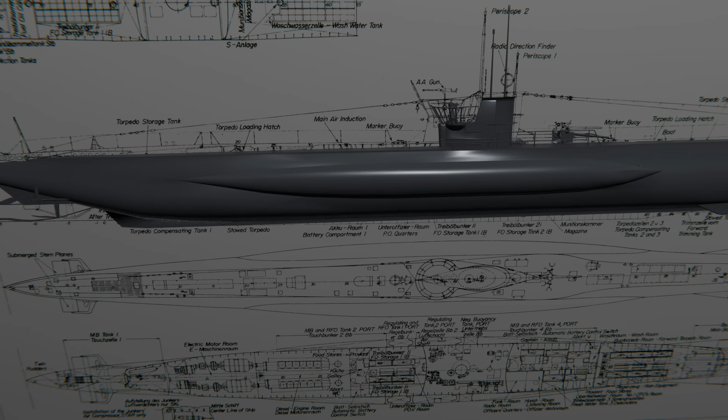At 7:39 p.m., the order was given. A single torpedo slipped from its tube and raced toward the unsuspecting liner. The explosion tore through the Athenia's hull, the concussion ripping apart the engine room and instantly killing several crew members below decks. Lights flickered and then died as seawater rushed into the gaping wound. Within minutes, the ship began listing to port.

Panic erupted on the crowded decks. Lifeboats were lowered in frantic haste, some crashing into the sea as inexperienced passengers struggled with the mechanisms. Women screamed as they were separated from their children in the chaos. The ship's radio operator desperately tapped out SOS signals as the cold Atlantic water rose steadily through the vessel.

The truth would eventually surface, but not before the tragedy had claimed 112 lives, including 28 Americans. The sinking sent a shockwave through diplomatic circles and newspaper headlines around the world. For Winston Churchill, it was a propaganda gift, proof of German cruelty. For Franklin D. Roosevelt, it was a grim reminder of how quickly neutral lives could be lost in this new war.

After the torpedo's deadly strike, U-30 slipped silently beneath the waves, leaving behind the chaos and screams of the sinking Athenia. Lemp ordered the submarine to dive deep and set course eastward, running quietly on electrical motors to avoid detection by any British warships that might respond to the distress calls. The crew moved with practiced efficiency, though some stole uneasy glances at each other. This wasn't the military target they'd expected.

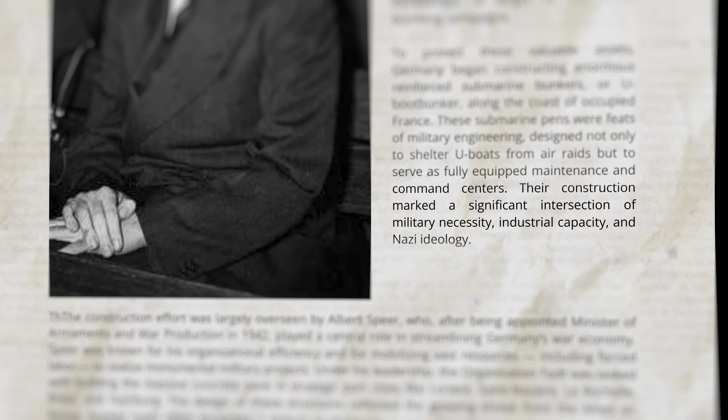Dönitz found a powerful ally in Albert Speer, Hitler's architect and later Minister of Armaments and War Production, who recognized the strategic importance of protecting Germany's submarine fleet. Speer's organizational genius and control over production resources proved crucial in turning Dönitz's vision into reality. The actual construction was overseen by Organisation Todt, the Nazi civil and military engineering group, under the leadership of Fritz Todt until his death in 1942, and subsequently by Speer himself. The collaboration between these men created one of the most formidable defensive systems of the war, with construction priorities often overriding other military projects due to Dönitz's direct access to Hitler and his position as one of the few military leaders who maintained the Führer's confidence throughout the war.

The engineering challenges involved in building these pens were staggering. Each facility required hundreds of thousands of cubic meters of concrete, thousands of tons of steel reinforcement, and an army of workers laboring around the clock under often brutal conditions.

The French ports selected for these bases, particularly Lorient, Saint-Nazaire, La Rochelle, and Brest, were chosen for their strategic locations facing the Atlantic, but converting them into a fortress required a complete reimagination of traditional port infrastructure. German engineers developed new concrete formulations and construction techniques to create structures that could withstand direct hits from the largest bombs available to the Allies at that time.

The roofs of these pens were designed with multiple layers, often including a softer concrete layer to absorb blast energy beneath the harder outer shell, a concept that anticipated modern composite armor principles.

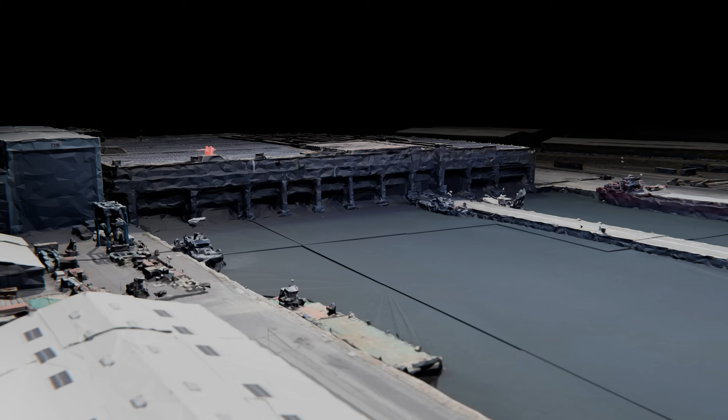The entire landward side was further protected by flak positions with 88mm guns mounted on massive concrete pedestals, their firing arcs calculated to create overlapping fields of fire against both aircraft and ground attacks. The basin's water circulation was carefully engineered with a system of gates and channels that allowed continuous water exchange to prevent stagnation, while underwater microphones detected any attempted sabotage by divers.

The entire perimeter was illuminated at night by searchlights mounted on retractable towers that could be lowered into concrete shelters during air raids. This combination of maritime engineering and military fortification created what German propaganda called the unsinkable aircraft carrier on the Atlantic coast, a base that survived countless Allied bombing attempts and remained operational until Germany surrendered in 1945.

The La Rochelle submarine pen complex was an architectural and engineering marvel of the Third Reich's naval infrastructure, featuring 11 individual docking bays that were each designed as self-contained submarine maintenance and repair facilities. The multi-floor design of each dock was a carefully calculated response to the complex operational requirements of U-boat warfare, the physical constraints of the massive concrete structure, and the need to maximize efficiency with the limited protected space of the fortified enclosure.

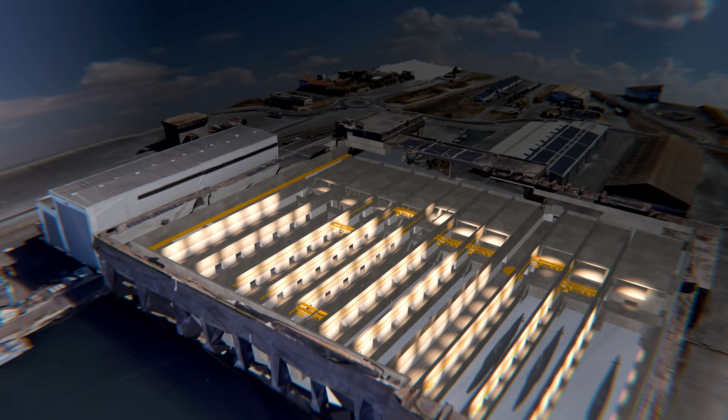Each of these 11 docks followed the same fundamental three-level vertical organization, but with subtle variations in equipment and layout, depending on their specific position within the complex and their designated functions. At the very foundation of each dock was the submerged operational level, a carefully engineered underwater workspace that extended from the basin floor up to the waterline.

This zone maintained a constant depth of 8 meters to accommodate the draft of Type 7 and Type 9 U-boats, with the concrete walls featuring specially designed fendering systems made of timber spaced 50 centimeters apart to protect both the submarine hull and the dock structure itself. The basin floor was not flat but slightly sloped toward the central drainage canals that fed into powerful pumping stations capable of completely draining the dock in under 4 hours when necessary.

This underwater level was illuminated by waterproof lamps installed behind thick glass portholes set into the dock walls at 2-meter intervals, creating adequate visibility for divers performing hull repairs or inspections. Rising above the waterline was the primary working deck, an expansive 2.4-meter thick reinforced concrete platform that formed the heart of each dock's operations. This level extended 15 meters back from the dock edges on all sides, creating a vast workspace that was precisely leveled within 5 mm tolerance across the entire surface.

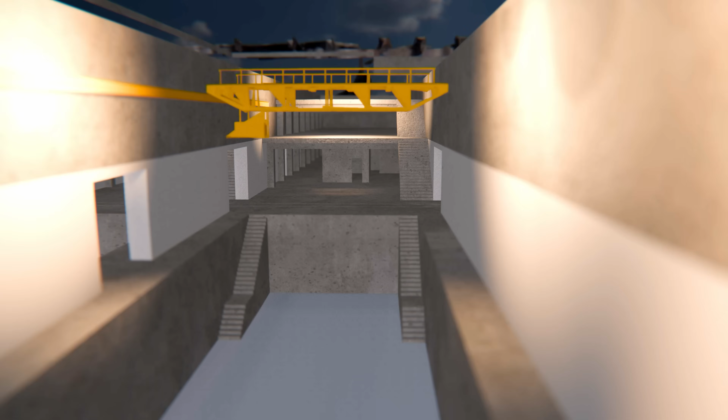Along the walls, a continuous workbench ran at 90 centimeters height, fitted with mounts, electrical outlets, and compressed air connections at 2-meter spacing. This main working level also contained several permanent installations in each dock, including a 5-ton jib crane near the bow position, a torpedo loading gantry, and a diesel fuel transfer station at the stern area.

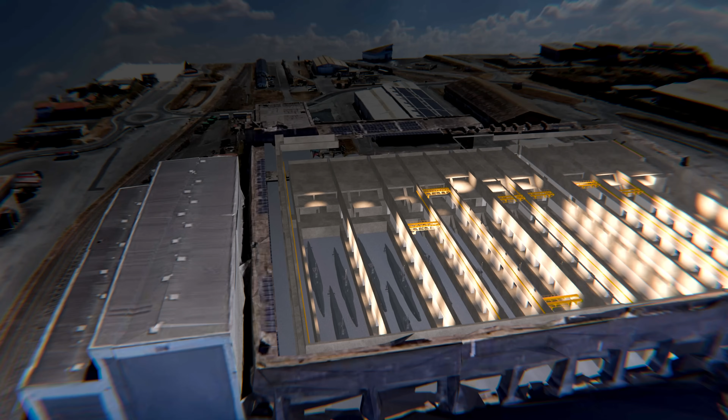The intermediate level, located 6.5 meters above the main working deck, housed the dock's mechanical infrastructure in a series of reinforced concrete alcoves set into the perimeter walls. To port were the electrical distribution rooms with their massive converters and switchgear. To starboard were the compressed air stations with their banks of high-pressure storage flasks. Aft housed the ventilation and control centers with their complex systems of dampers and filters, and forward contained the emergency power generators and fire suppression controls.

The upper operational level at 13 meters elevation was more variable in its layout between docks, reflecting their specialized functions. In the 6 central docks, this top floor formed a complete mezzanine covering about 70% of the dock area, housing the dockmaster's control room with its panoramic windows, the radio monitoring station, and the precise instrument workshops.

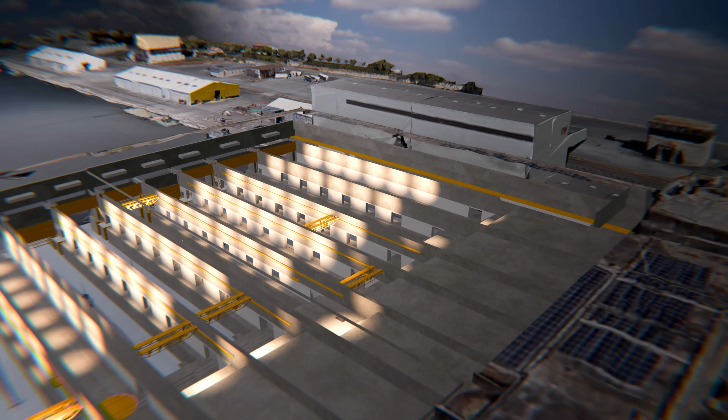The remaining 3 docks to the north had larger open areas at this level to accommodate the overhead crane systems needed for conning tower repairs. This sophisticated multi-level design allowed each of the 11 docks to function as an independent repair facility, capable of handling all aspects of submarine maintenance, except the most extensive overhauls.

The vertical separation of the activities improved both safety and efficiency. Potentially explosive battery work happened on the submerged level, away from the spark-producing metalwork on the main deck. Precision optical work occurred on the stable upper levels, away from the vibrations of the heavy machinery below.

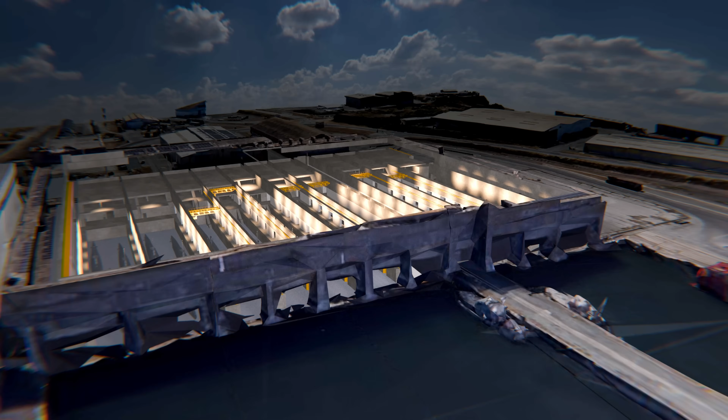The design also provided redundancy. If one level was damaged, work could continue on others. And security, as access between levels could be easily controlled, with over 38,000 square meters of functional workspace distributed across the multiple levels in the complex. La Rochelle pens could service up to 22 U-boats simultaneously, while protecting them from Allied bombs. A testament to the ingenuity of German naval engineering at the height of World War II.

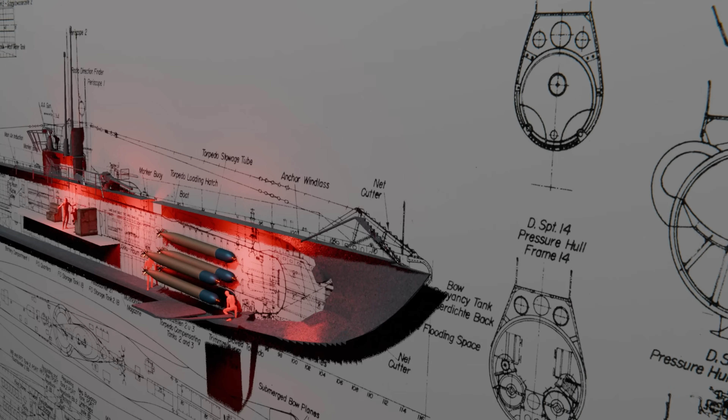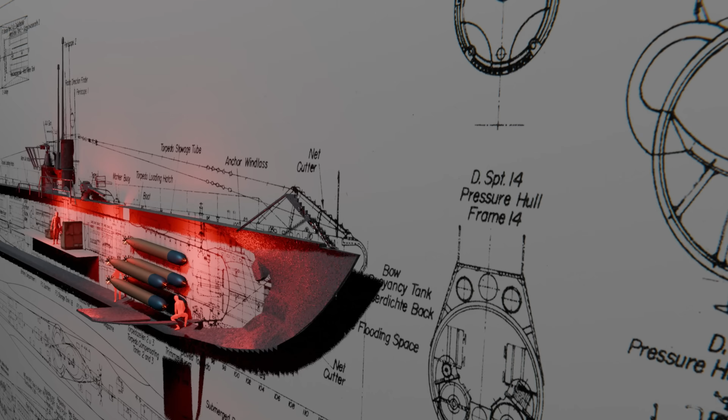The process of reloading torpedoes into submarines housed within the massive U-boat pens of La Rochelle was an intricate and labor-intensive operation, requiring meticulous coordination among specialized personnel, careful handling of heavy and volatile ordnance, and the use of purpose-built machinery designed to function within the confined and heavily fortified environment of the bunker. The reloading procedure itself was a carefully choreographed sequence influenced by the submarine's design, the layout of the pen, and the need to maintain operational secrecy and safety.

Before a torpedo could be loaded, it first had to be transported from one of the heavily guarded storage areas within the pen complex. These storage rooms were often located in chambers or in the rear section of the bunker, shielded by thick concrete walls to prevent catastrophic explosions in case of an accidental detonation or an enemy bomb strike.

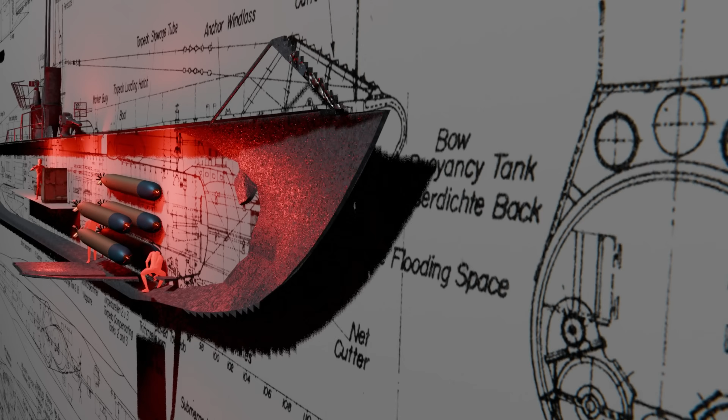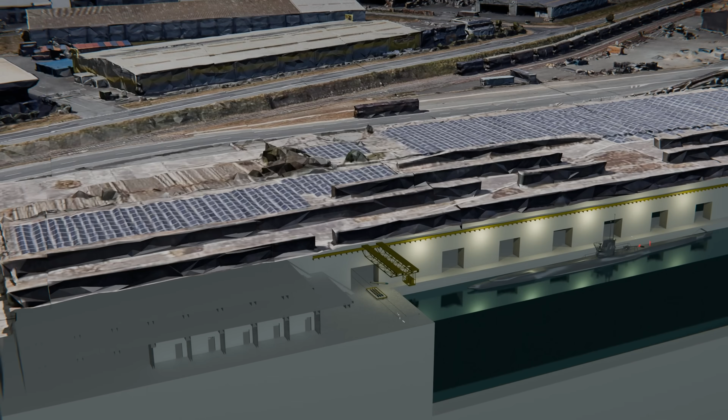The torpedoes themselves were delicate, yet extremely dangerous weapons, weighing between 1.5 and 2 tons each, depending on the type. They were filled with explosives, compressed air, and in case of electric torpedoes, volatile batteries that required cautious handling. Given the weight and sensitivity of the torpedoes, any sudden jolt or mishandling could result in damage of the weapon, or worse, an accidental explosion, so movement was slow and deliberate.

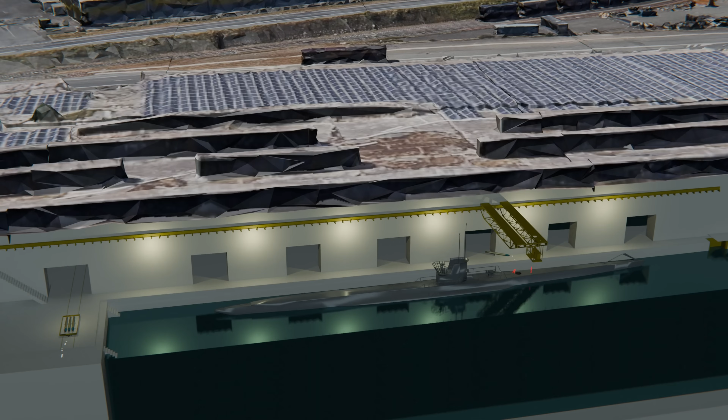Once the torpedo trolley reached the designated U-boat, the next phase of the operation began, lifting and aligning the torpedo for insertion. This was accomplished using heavy-duty overhead cranes, which ran along tracks mounted on the reinforced concrete ceiling of the pen. The cranes were capable of lifting multiple tons and were operated by experienced technicians who carefully maneuvered the torpedo into position.

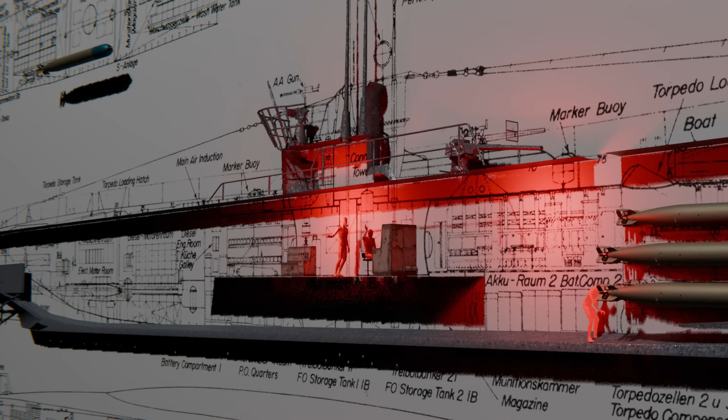The submarine's crew, working in tandem with the dockyard personnel, would prepare the torpedo loading hatch, typically located on the forward deck for bow tubes, or alongside the hull for stern tubes. Some U-boats, such as the Type 7 and 9, had external torpedo storage compartments that required additional steps to access.

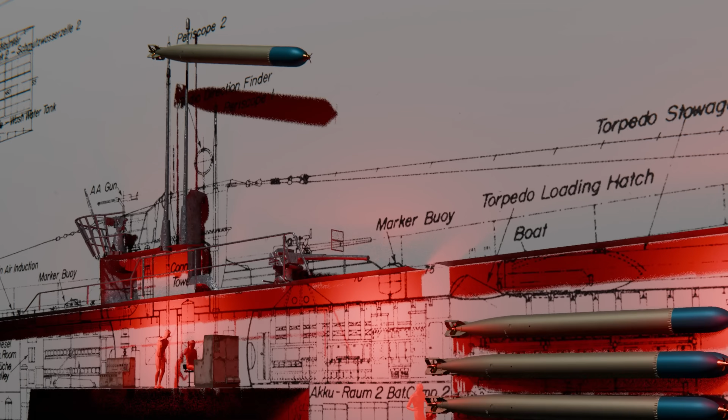The cranes were capable of lifting multiple tons and were operated by experienced technicians who carefully maneuvered the torpedo into position. As it was lifted, teams on the submarine's deck guided it into alignment with the open torpedo tube or loading hatch. Inside the submarine, the torpedo room crew would receive the weapon, sliding it into place within the tube or storage rack.

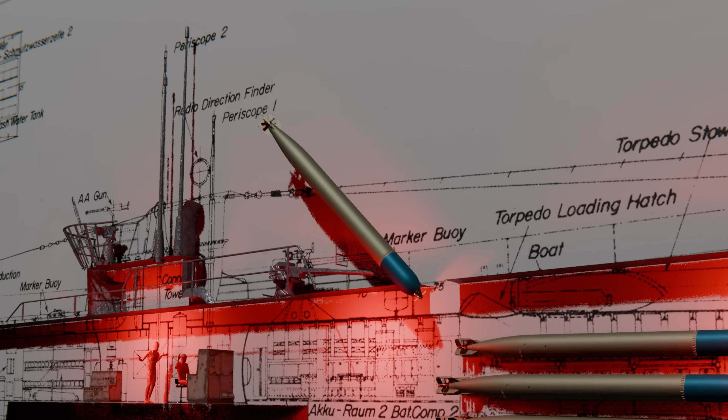This step required extreme precision, as even a slight misalignment could jam the torpedo, rendering it unusable until manually freed. A time-consuming and dangerous task. Once inside, the torpedo was secured, connections for guidance systems were checked, and the tube was sealed. The typical attack submarine carried between 12 and 22 torpedoes, depending on its class and mission profile.

Given the claustrophobic conditions inside the pen, dim lighting, limited ventilation, and the ever-present hum of machinery, the work was physically grueling. Additionally, the threat of Allied bombing, though mitigated by the pen's thick roof, meant that efficiency was paramount. Some pens even had emergency protocols for rapid reloading in case of an imminent alert.

After all torpedoes were loaded, final checks were conducted to ensure proper arming and functionality. The U-boat's crew would then prepare for departure, often within hours, as the La Rochelle base was a key hub for Atlantic operations. The pens' ability to facilitate rapid rearming and repairs was a critical factor in Germany's U-boat campaign, allowing submarines to return to sea with minimal delay.

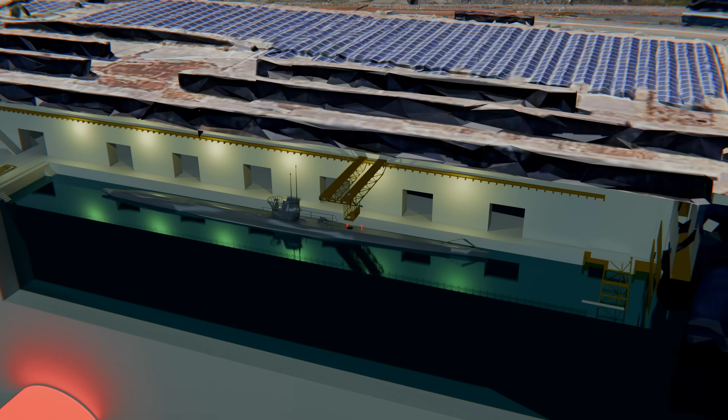Despite their formidable defenses, however, the pens were not invincible. Allied raids, sabotage, and logistical disruptions eventually reduced their effectiveness as the war progressed.